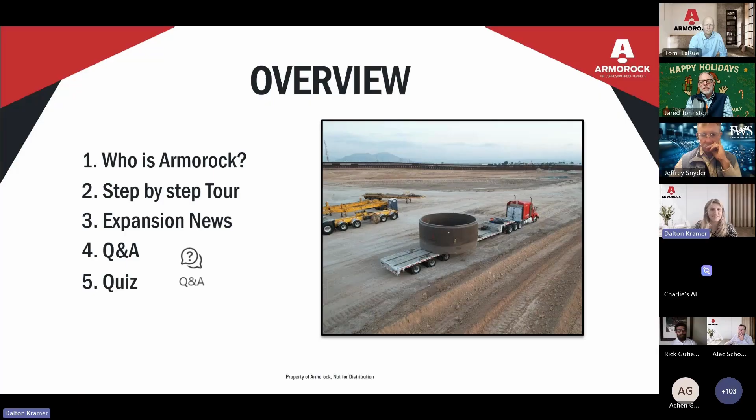So quickly here, introducing our speakers. We have 2 speakers today. First, we have Jared Johnston, tenured Armorock employee, account executive in Florida. Next, we have Tom LaRue, a newer member to our team. He's the National Director of Solutions Engineering, and he's also going to share a little bit about his department that is new to Armorock. So I will hand it over to them now.

Thanks, Dalton. Appreciate all of you joining us today. As Dalton mentioned, my name is Jared Johnston. I've been in this industry for 20 plus years, started my career in project management, and went to work for Geneva Pipe, the sister company to Armorock, back in 2010, and then transferred over to Armorock in 2017. And I'm excited to introduce our product to you today.

And I'm Tom LaRue, the National Director of Solutions Engineering. Prior to joining Armorock, I studied civil engineering at Purdue. I was on the design side of civil projects for about 10 years. I know many of you are civil engineers working those designs. I've been in those cubicles on those projects before. Then for the last 10 years, I've worked with various stormwater and wastewater manufacturers, product management, market management, evaluations, things of that nature. But excited to be with Armorock and growing the solutions team.

So aside from myself, we've got a very talented group. Chris Juman's a longtime Armorock employee and engineer, has worked in deep engineering roles with the plants, a wealth of knowledge for the team, for the company, and now for the customers. Alec is based in the Orlando area. He's another longtime employee, has served a number of roles, very instrumental now in the market along the East Coast. And then Drew Tanner is based in Salt Lake. He, like the other 2, is a longtime employee, has provided a ton of value internally and is now sharing that knowledge externally. Currently traveling in the Portland area, doing a number of presentations, drumming up support for polymer in the Northwest.

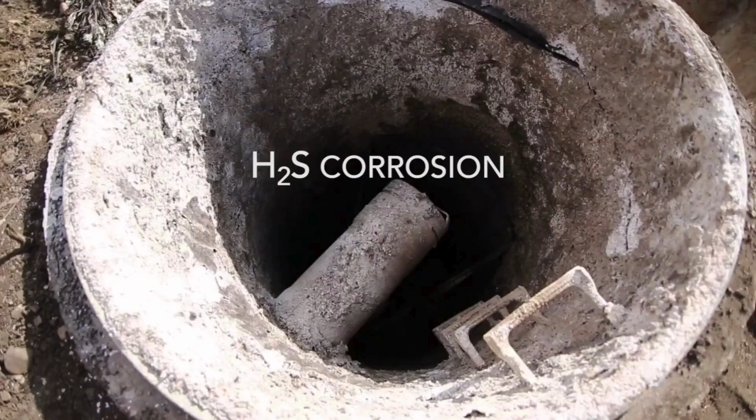Unfortunately, those have a minimal life expectancy when it comes to H2S and the corrosion that we're dealing with. So he had to abandon the idea. He went to cast-in liners next. That's where they cast the HDPE liners into our product. And inevitably, that H2S, the Thiobacillus bacteria, would find a way behind those barriers and break down our material, and we weren't able to warranty them.

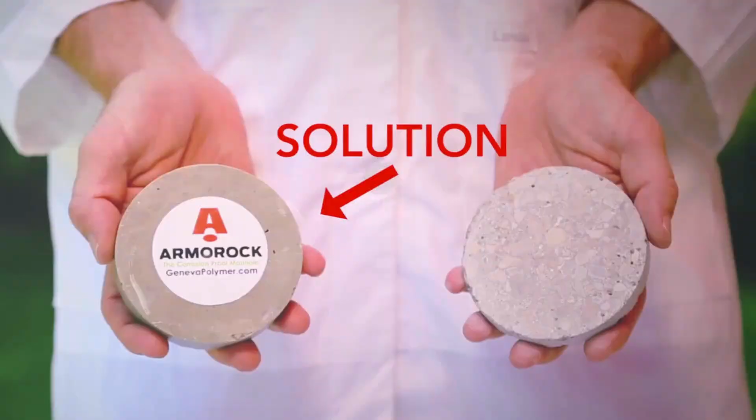And the last ditch effort was admixtures. Admixtures are designed to be cast into your product. It fights the MIC, microbial induced corrosion. And we quickly found that the parts per million that we were dealing with in the system was too much for that also. If any of those three Band-Aid type products would have worked, we would not be here speaking to you today introducing Armorock. But we had to do a full stop to that and transition to a full stop solution. That's what we're going to introduce to you today.

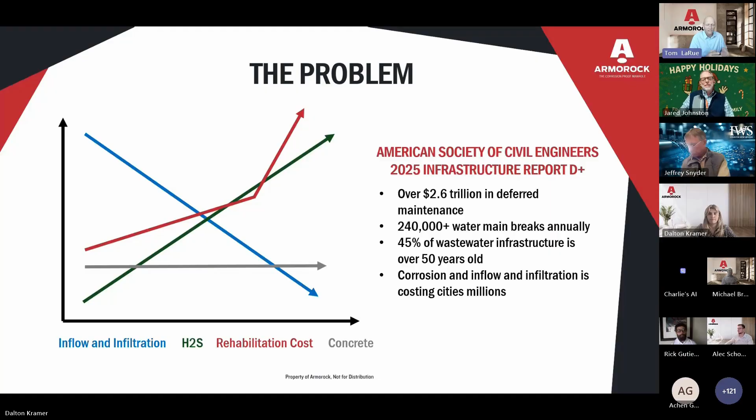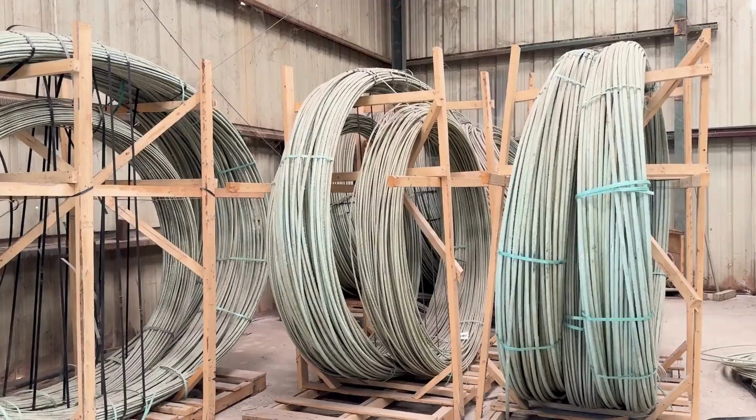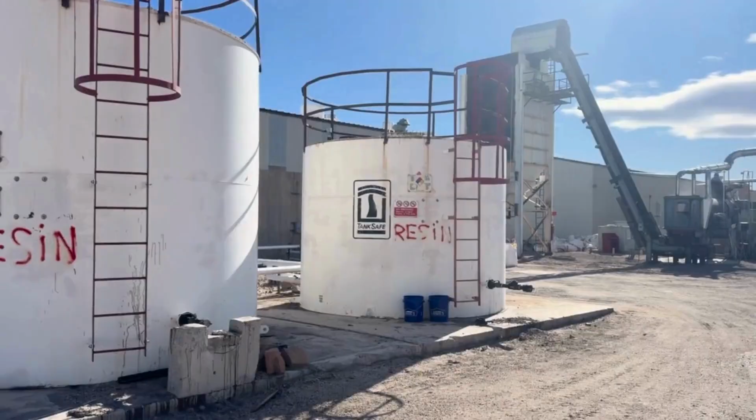So the key ingredients start very similar to traditional concrete. We use small aggregates and sand. You'll see the small aggregate to start the picture. Our aggregate tends to be smaller than typical concrete. We get a tighter matrix. We use fiber reinforced rebar. That's what's seen here. The fiber reinforcement is non-corrosive, so nothing in our structure, inside or out, is susceptible to corrosion. We use resin. That's the most important piece.

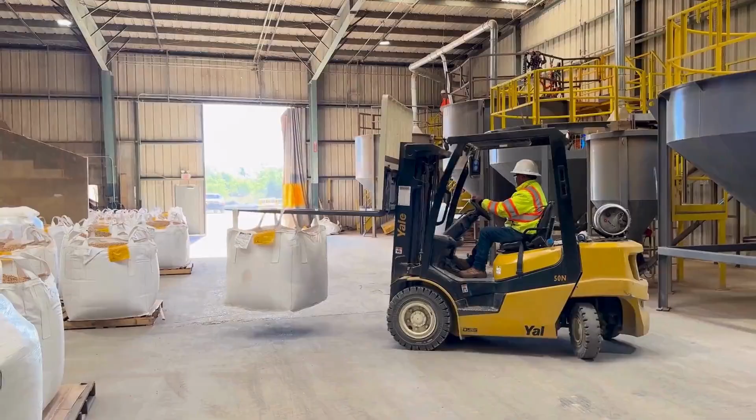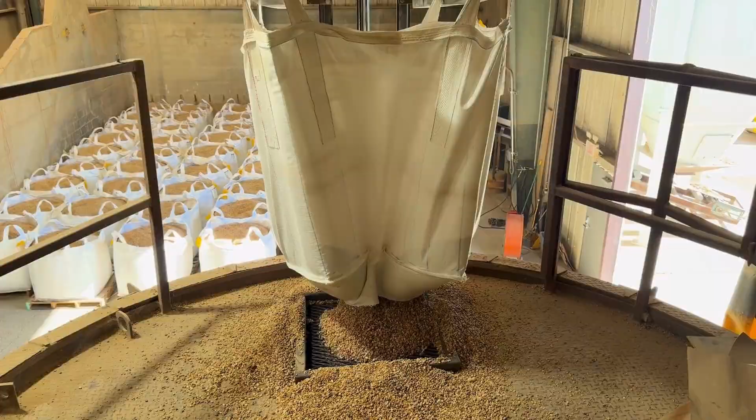In lieu of Portland cement, that's the binder. That's the glue. It removes the corrosive component and replaces it with a non-corrosive resin that provides that binding without the corrosive aspect of Portland cement. We saw briefly the silica sand, the small aggregate sand, similar to what's used in concrete. It's silica sand, non-corrosive sand. These are non-corrosive quartz or granite small aggregates. So nothing inside or outside of the structure is susceptible to corrosion. It's all completely inert. That's the key difference between polymer concrete and Portland cement-based concrete.

It's just a better solution for the environment in which it's being installed. Tom, we just had a quick question come in from Jennifer. She wants to know, and this is probably getting ahead a little bit, but it's always a valuable question: what is the life expectancy of polymer? You mentioned that concrete, 48% of the system is over 50 years old now and is breaking down at a high rate of speed. What are we expecting polymer to last in this industry?

That's a great question, Jennifer. Thank you for sending that in. We have a 50-year corrosion-proof warranty. That is uniform throughout the polymer industry. It's a requirement for our ACI spec. So the minimum design service life is 50 years. What actual life cycle testing has shown is the true design service life is hundreds of years.

There's not a known failure mechanism. The product is completely inert. It is inert day one forever. So it's not going to become corrosive 50 years in. So chemical corrosion will not be what brings down polymer concrete. The structural capabilities are very impressive. We have a minimum 10,000 PSI compressive strength.

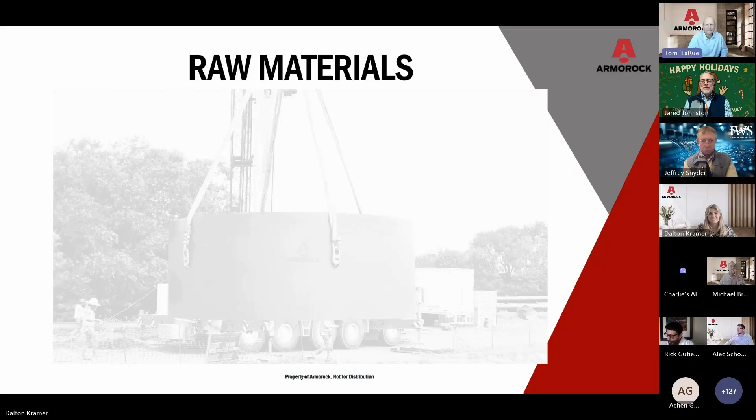Okay, the Pico machine. This is actually my favorite thing to talk about, and everyone who knows me knows I love to talk. This gives us the ability to do things that other producers of polymer and people in the precast industry cannot do. We're the only people that use a Pico machine, which is a 7-axis robot. That 7-axis robot allows us to go from your CAD designs straight into production and come up with the exact dimensions of what you want. So as you're looking at this happening here, please think outside of the box where it could be a benefit to you and your municipality.

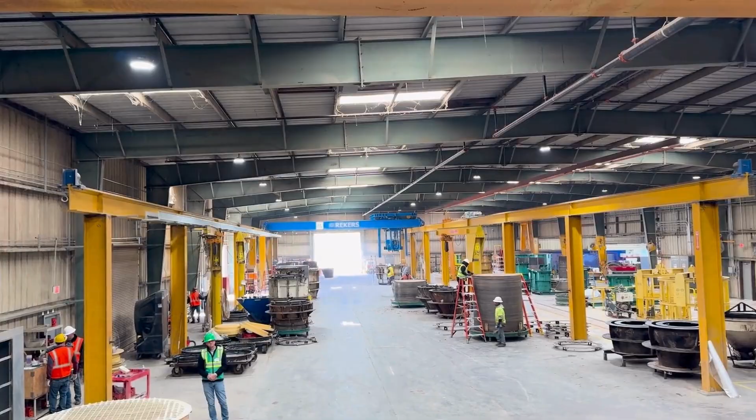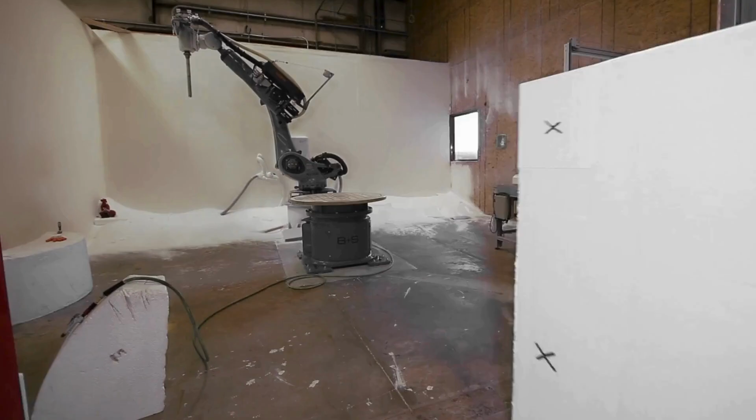And it all starts with foam. We take that foam, we use our 7-axis robot here, and we cut that out. The reason we use this is because every municipality in the nation has a slightly different standard. Some people like their pipes to come in 3.5 inches, some as much as 6. That's called the pipe bed. Some use cast-in gaskets or boots, some use bolt-in boots. And this gives us the ability to match your request. We don't ask you to match what we can do.

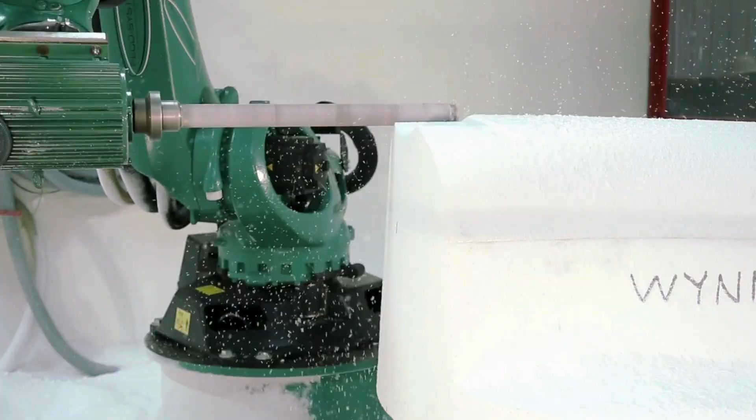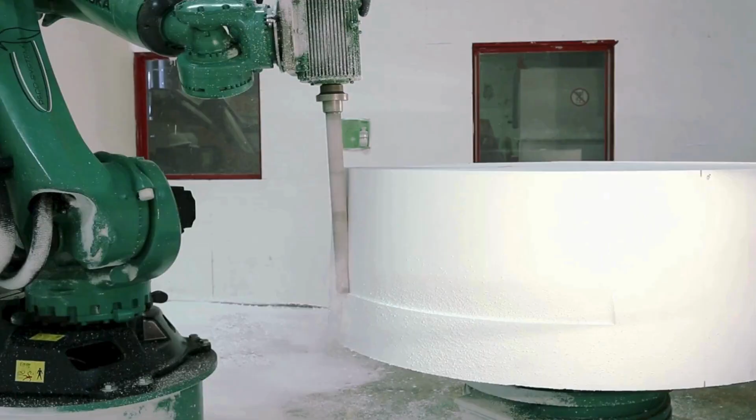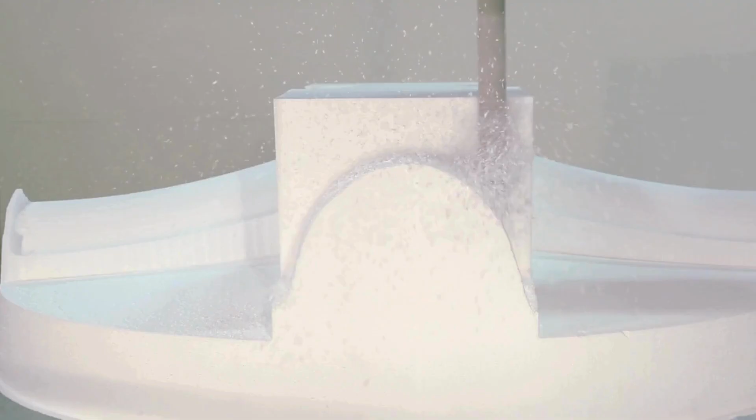And it gives us the ability to make monolithic bases. The importance of building a monolithic base, whether it's a wet well, lift station, siphon box, or a manhole, is to eliminate any potential of I&I getting into your system. Now here it's making a three-way, and you can start to see that shape happening there. This is going to be the opposite of what you see when it's finished. You can also see how smooth those transitions are. By making smooth transitions, we eliminate any potential agitation of the effluent going through that product.

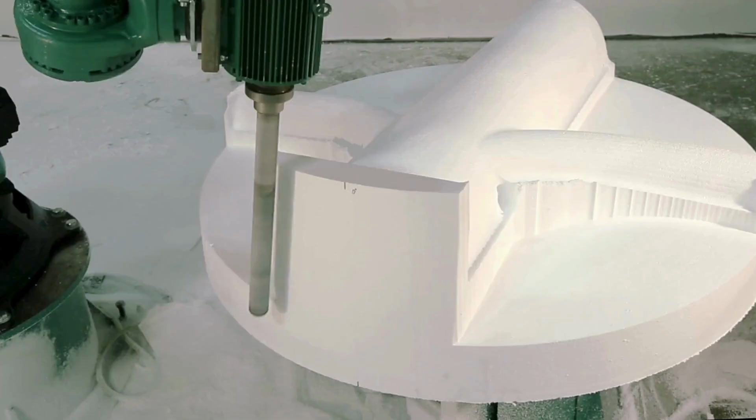And when we cut down agitation, we cut down H2S. So smooth transitions are helpful there. Now, H2S will not affect our product. As Tom pointed out, we have a 50-year warranty on our product, but it surely will affect the rest of your system. So we want to do our best to help maintain that.

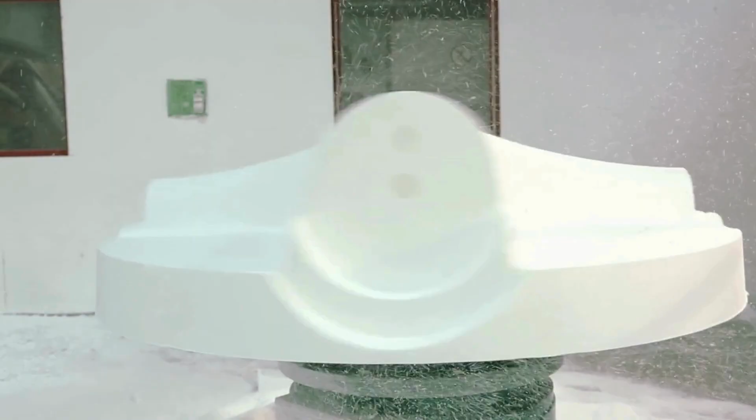Can you pause it right there, Dalton? This is a really good example of a pipe bed. On the left-hand side of the image there, that is about a 3.5 inch step in. That's where the pipe is going to set and match up to that invert perfectly. Again, eliminating that agitation and giving us the abilities to fix that.

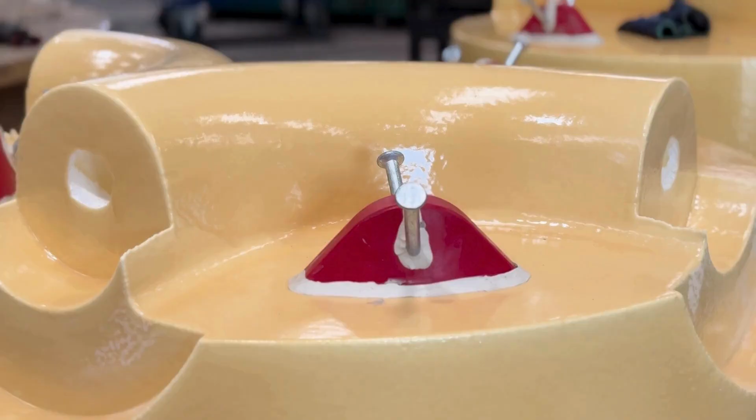You also see the only steel in our product. We love to say we're 100% corrosion proof, and our product is, but for those that are astute and are paying attention, that is an A anchor. That's a galvanized steel. Now that will not affect our product. Eventually, it will be covered up with polymer grout in the finished product. And currently, that is the only steel in our product. Unpause. Thank you, Dalton.

Once we're done creating this product, you can see again how smooth it is. We're going to put it into our jacket or our form. We have forms that range in sizes from 48 to 192, and we'll show that in this next video here.

Jared, we had a couple questions come in. Nikki asked what the yellow coating is on the foam. Oh, yeah, that's a great question. It's a trade secret. We don't totally give that away, but I can tell you this: it is sprayed on and it keeps the resin. The resin actually has a very high heat to it. Oh yeah, you can keep that running in the background. Thank you. We can spray that product with this material, and that gives us the abilities to keep a library of that product.

So for instance, if you make a 0180 or a 090, a common use invert, we could use that up to 5 times before we recycle it. So when we're done using our foam, we'll grind it up. You can see it's in the makeup here in the background. You'll see what it looks like when it's ground up, much like what you'd put in a beanbag chair.

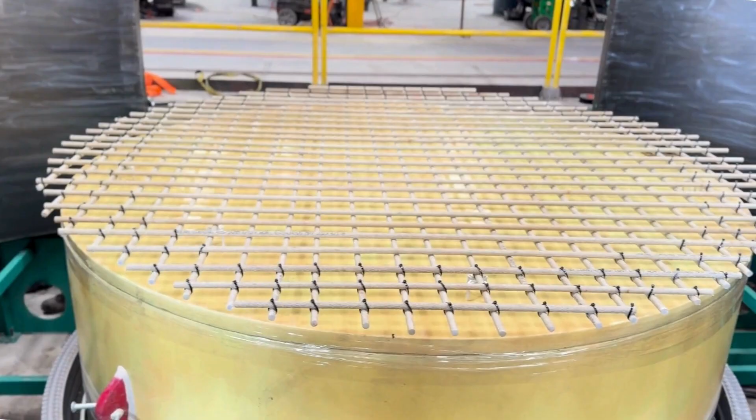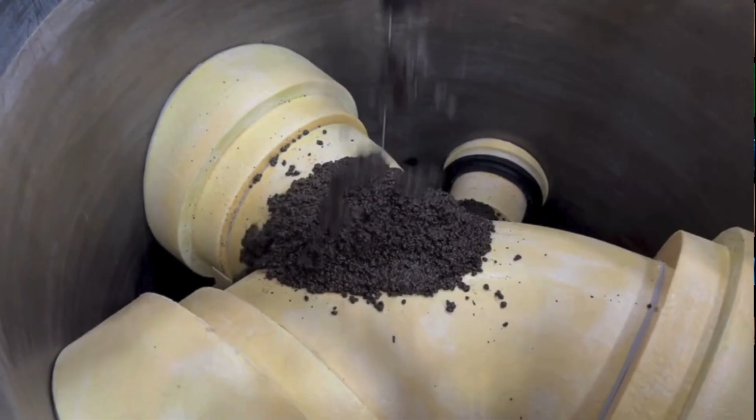Great. Next slide, please, Dalton. Oh, pouring. We're already there. Fantastic. On the pouring feature, this is exciting. So now we've taken that yellow product, as we identified earlier, we put it inside of our forms. And this is where we're going to come up with the monolithic. Can we pause it there for just a moment? This is what gives us the ability to make monolithic bases.

Again, if you note, let's circle one of those pipe bed areas on those, Dalton. There you go. That's where the pipe penetration is going to be in your structure. And the width of that is determined by the type of pipe you have. So if you have an HDPE, it's going to be a specific thickness, SDR, another, clay pipe, RCP, etc. This is one of the great features. The next one there in that same area tells you how far the pipe can come into that structure.

And more importantly, and this is very important, you can control the amount of deflection you have in that pipe. So for instance, a traditional boot has 7 degrees of deflection, 3.5 degrees left, right, up, or down for a total of 7 degrees. If your municipality has a different standard and you only want to allow 2 degrees of deflection, we can tighten up that invert to match exactly what you want. Okay, we can unpause there.

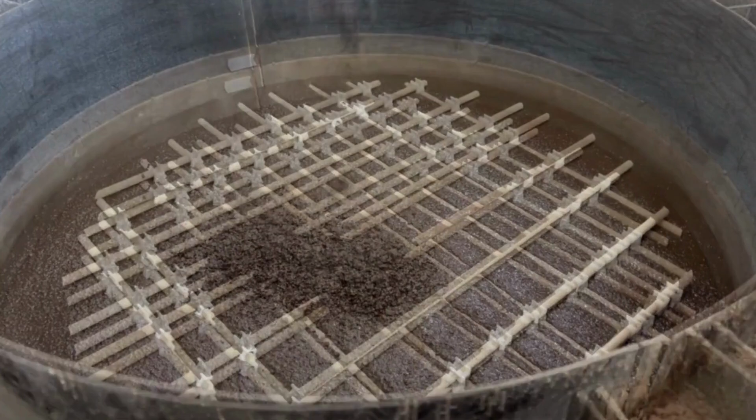As the material pours in, this is a self-consolidating, very much like a self-consolidating concrete, but this is a resin-based product. We have little to no air entrapment in our product. Pause right there. Tom, you talked a little bit earlier about the FRP bar. Could you take a moment and talk about the importance of this bar and why it makes us different from the rest of the people in the industry?

Yeah, absolutely. So this is a great shot of that rebar matrix in the base of the structure, providing additional structural, specifically tensile support in the base. Again, it's the fiber reinforcement. So a question we get all the time when talking to jurisdictions when they're looking to utilize the product on new development is, what if we need to channel into it, add a new line and carve a new channel? And that's completely fine. You'll be carving through 10,000 PSI concrete, but you can carve through.

You're not going to expose any materials that will invalidate our 50-year warranty. Nothing inside or out susceptible to corrosion. So you're free to add a new channel for a new line with no problem. You can also see those rebar ties are plastic, so not traditional metal twist ties that would be made of steel. These are plastic ties. So again, nothing corrosive being introduced to the material at all.

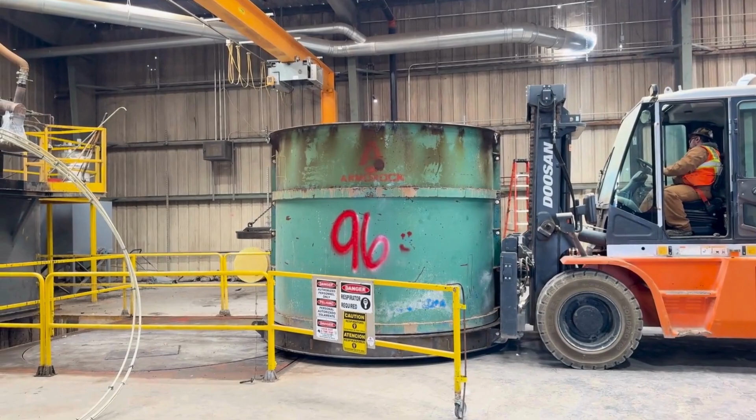So after the material's poured in, polymer concrete has the capabilities to cure out very quickly. In fact, we traditionally are pulling out of our molds between an hour and an hour and a half of time, which gives us the ability to rotate our molds upwards of 3 times on a shift. As the product's pouring in, you saw on the large diameter structures, it's done elsewhere in the shop. We carry in 2-ton buckets.

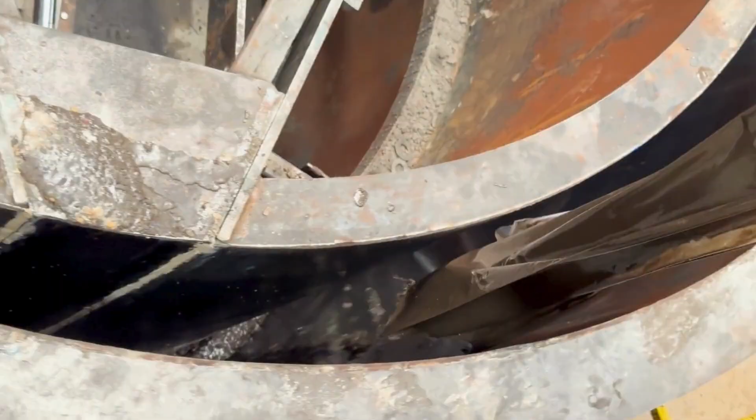In this scenario, we move the mold onto our turntables and we pour the product in a circumference around that product, slowly building that up. Again, that will push all the air entrapment out of that product. The less air entrapment you have, the less chance you have for I&I going through that product. There's some of the hoop designs going in. Those will drop in as we're building up that structure. We started with the base FRP bar that you saw, and we'll finish off with an FRP rebar in our lid.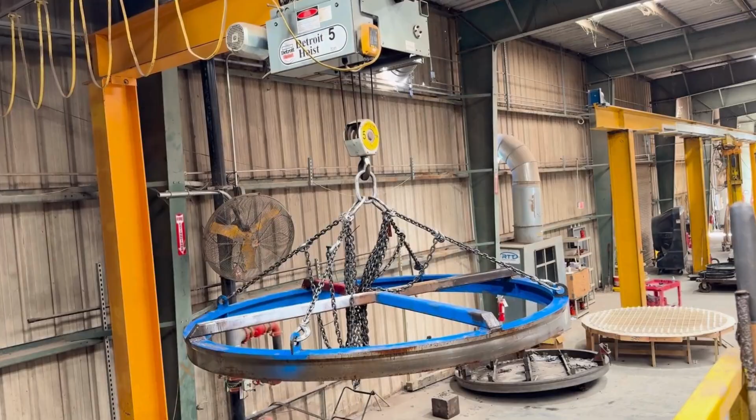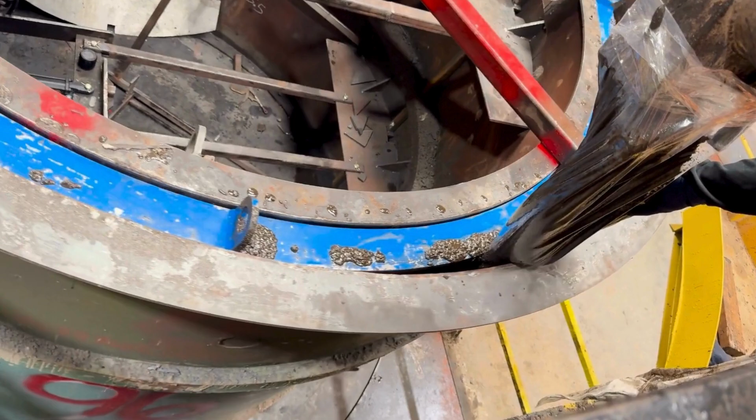It is important to note that all of our products are HL93 load rated. We do not require any soil to get to the strengths. Lastly, once we're done, we'll put in the former here. That's for the bell and spigot former, and that represents the top of the product. So they'll finish pouring up to that blue grade there, and that creates our bell. And then again, they'll finish it off with the last bit of reinforcement.

They do have little gray HDPE spacers on there to make sure that is perfectly aligned inside that structure. And then within the next hour and a half, we're moving this product around our yard, putting it into our inventory.

Great, Jerry. We had a couple questions come in that I think we can address right now. Pranshu, and I apologize for the pronunciation, asked, what temperature do we need to use for melting resin and mixing it with the aggregates? That's an interesting one. So resin comes in a liquid form, so we don't need to melt it in that scenario. But we do need to keep our temperatures controlled in our building. And we typically try to stay between 60 and 90 degrees in our building. That can be challenging in some of our summer climates, especially in our West Coast plants.

And the cold temperatures, for whatever reason, Texas gets awfully cold, and they have challenges there where we have to run heat. That gives us the capabilities to be a precast structure. But that's a great question. Thank you. There were two more parts of that question. What is the ratio of resin and aggregates in the mix? That varies depending on the mix design, but typically we like to be anywhere between 12 and 30%, depending on what we're trying to achieve.

And then I believe you mentioned it, how quickly the polymer concrete mix starts setting. And that's 60 to 90 minutes. That's right. And we could potentially speed that process up, but rarely would we want to do that. For high quality product, we are shooting for an hour to an hour and a half, depending on the temperatures inside our building. And then Talia asked, why do we pour upside down?

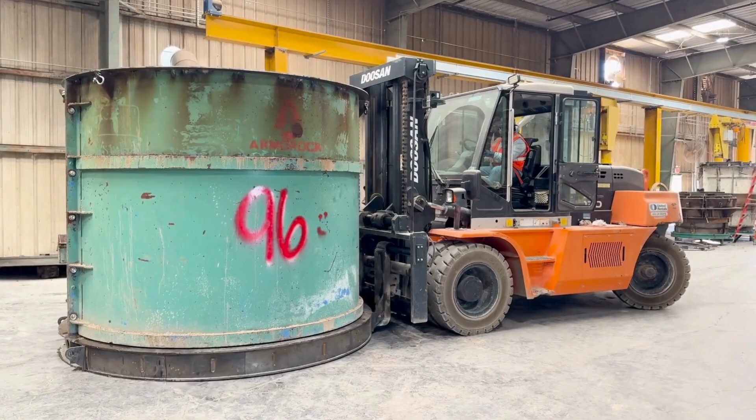Dalton, if you'll switch slides here. So the finishing product. Our company has really made great strides in the quality of our product. And we're going to show you a good example of that. This is just a typical mold. This is actually one of our older ones. Those have been replaced now. That's the quality of our product. Can you pause on that picture for a moment? That product is a virgin product. It just came out of a mold.

And as you notice, and as you look through these photos, you'll see very few of them that have little to no patching. That's the key. In fact, our goal this year was to hit 80% of our product to have no patches. And that's where we're going to finish out the year. Next year, 2026, we're going for 90% of our product, which is form to hole, which means we give it to you, the municipality, with no patching.

There's nothing wrong with patching polymer, but municipalities, just like when you buy a new car, you don't want Bondo on there and a respray. You want to know that product was perfect from the start. And that's where we're going as an industry. And we're excited to lead the way there. Unpause, please.

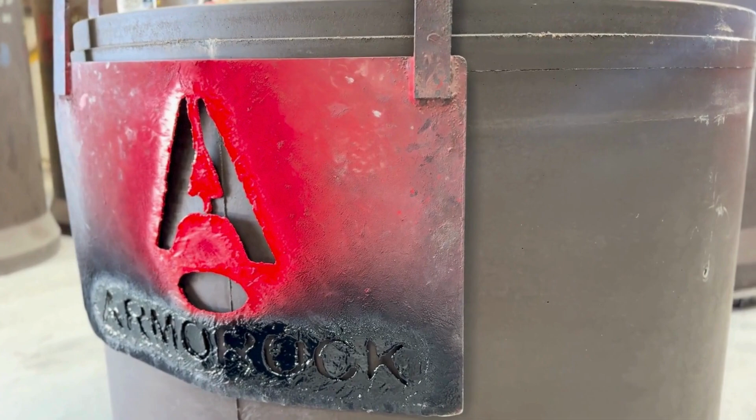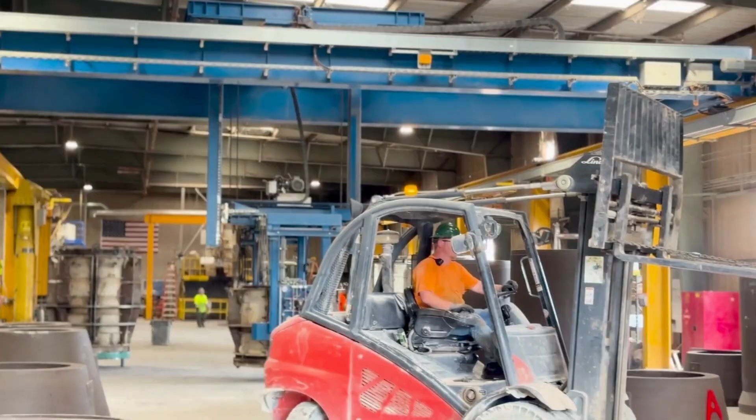When the product shows up to you, it'll obviously be marked with our Armorock name on there. It'll also have the job information, which you see in the background there, the size of the product and the height. And it's important to mark those products. Again, it has a 50-year warranty. We encourage municipalities to keep track of that date so you can know for sure how long that product has been in your ground.

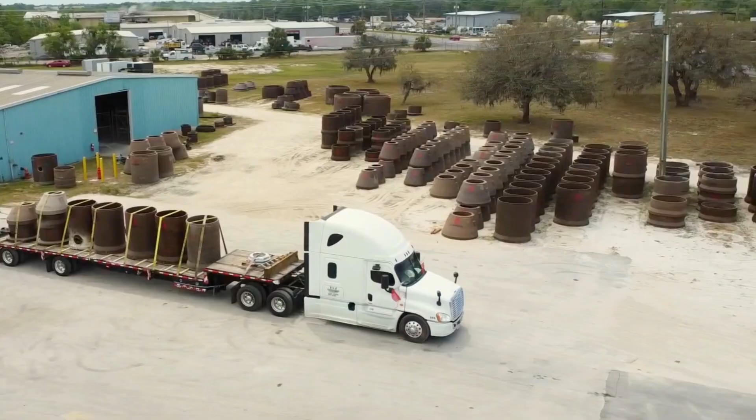As you see those in the background, you can see one or two little patches here and there. And that's typically, if we are doing any patching, it's very minimal. And that's because of the quality of the resin that we're pouring in there. In all of our yards, we inventory product. We inventory cones, risers, flat lids, bases, standard products. We also, where we're specified and work with municipalities, are going to start stocking lift stations, etc. Something that's never been done in the industry before.

Couple more, these should be pretty quick questions. Theo asked if the foam stays inside the completed structure. It wasn't shown being removed in the videos. Yeah, we actually have a vacuum that will suck out that invert, and then we'll put that back on the shelf and stock that away until we have another identical manhole request. And if it sits there too long, we grind it up and reuse it again. So there is no foam in the actual product as it goes out the door.

All there is is rock, the aggregates, the quartz or the granite, the resin, silica sand, and fiber reinforced rebar, which, by the way, is an ACI 440 rated rebar. It's also commonly used and approved by DOTs throughout the country.

And then Noah asked, what are our typical lead times? I love lead times. This is a differentiator, and polymer has a massive advantage. As I mentioned, we can rotate molds up to 3 times a day. Our company-wide goal is average jobs below 15 days, any size of job. That's a very big ask, and our polymer production teams have hit that goal this year. Our lead times are very quick. We are the largest polymer producer in the world, and we're very proud of our lead times.

All right, I think there's a few others in there. We see those, but we will address those at the end. Wanted to address the ones that are more directly related to the videos that we're showing, but there are some other good ones that Dalton will cover when we get there.

Tom. Yeah. Capabilities. This is another great capability of what we have. As you can see at the bottom there, we'll do 48s, 60s, 72s, all the way up to 192s. 192s, an example of that is on the left-hand side and the right-hand side of the images there. That's a 16-foot diameter structure. The one specifically you see in the picture was 137 feet deep. That kind of shows the capabilities of polymer. And that wall did not need extra reinforcement. That shows the strengths of polymer.

And then you saw the 7-axis router. Look at the unique inverts on the left and right there. That shows the capabilities and how smooth those transitions are of what we can do there. Please think outside the box. Don't think precast when you're doing our product. If you can design it, we can build it. And then, of course, we'll do boxes in whatever size we can ship. So it just comes down to the capabilities of shipping when it comes to box structures.

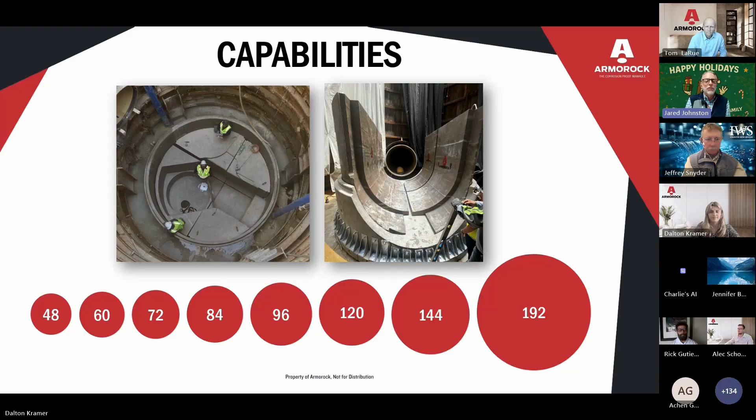Florida plant expansion. We started our plant here in Florida about 3.5 years ago. Our plant was first built in the 60s, and it was used for clay brick. It was in a U shape, and we took off the left side of our U and rebuilt that plant.

And in that plant, we're going to have the capabilities to do those 16-foot structures that we spoke about. We commonly ship those large structures all over the country. People are always surprised that we can ship such large projects around, but we can. It's difficult, but we have abilities to do so. But our goal is to have these capabilities in all of our plants. Florida is our second plant with the 16-foot structure capabilities, and we can create 80,000-pound parts out of this building.